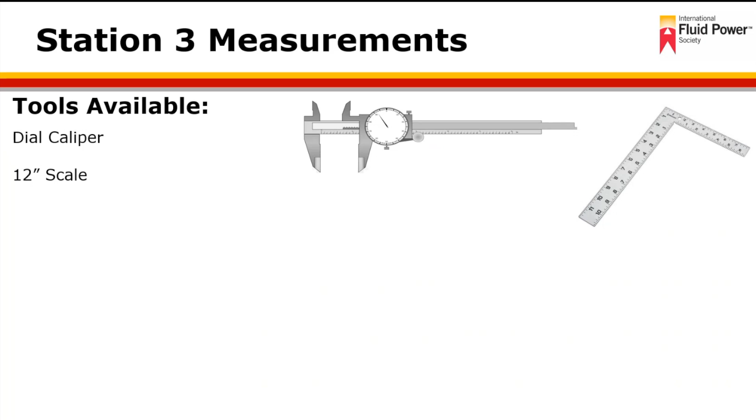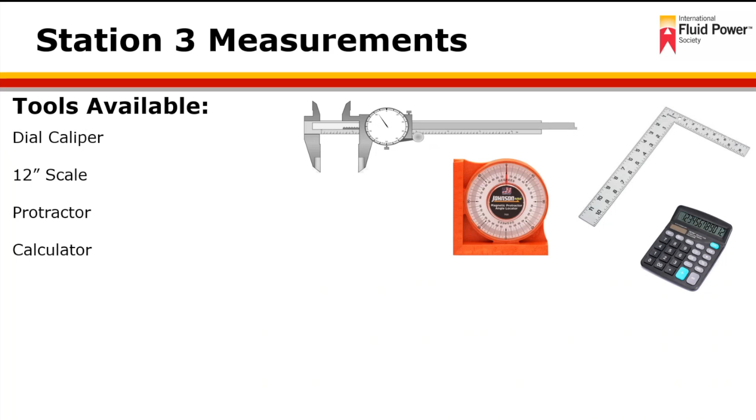The tools available at this station include a dial caliper used to measure the crimp diameter of the hose assembly, a 12-inch scale or square for measuring the hose assembly length, a protractor or angle finder for measuring the terminal end offset angle, a calculator for calculating the amount to be removed from the overall length to determine the hose cut length based on the terminal ends present within the hose assembly, a thread identification kit to aid in measuring the terminal ends for proper identification and sizing, a flashlight, and a magnifying glass, both for inspection of the hose assembly. And finally, available laminates at the station, which we will review shortly.

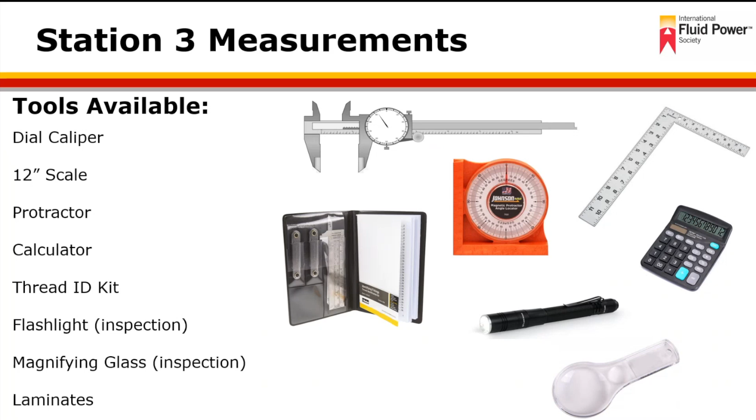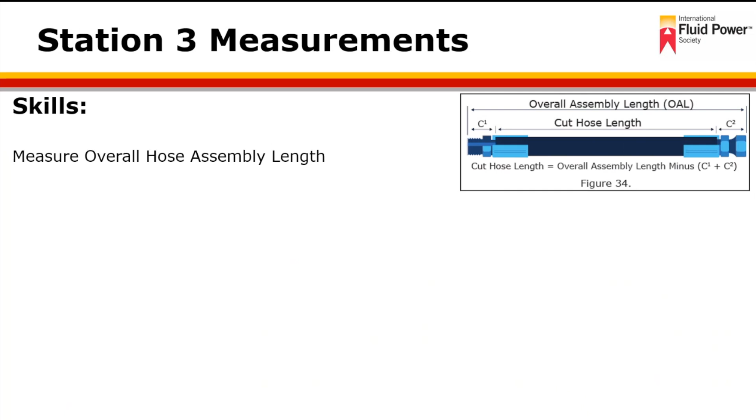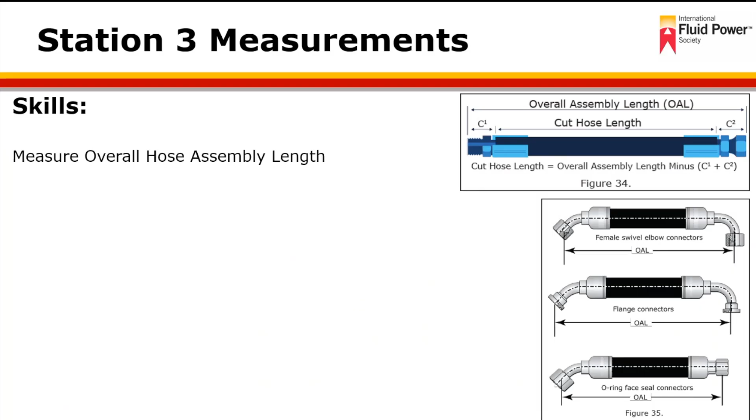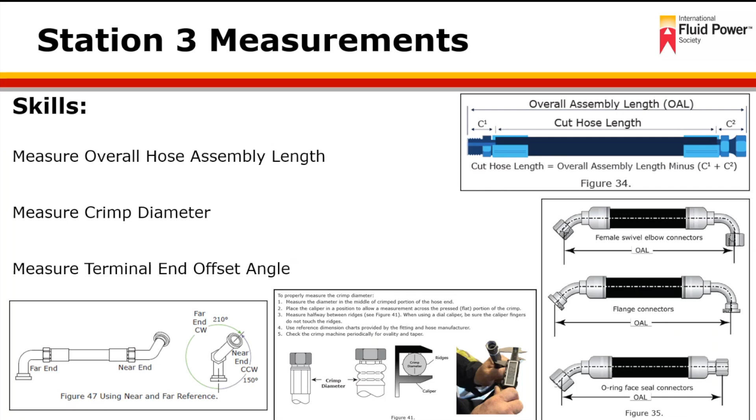The purpose of this station is to demonstrate one's ability to accurately measure the overall hose assembly length, remembering that the measurement points vary based upon the terminal end style and the fitting type. The station will also demonstrate one's ability to accurately measure the final crimp diameter to ensure that the hose is assembled correctly, keeping in mind to measure across the flats, at a midpoint of the crimp, and between the ridges formed by the crimping process. And finally, this station will demonstrate one's ability to measure the terminal end offset angle using a far reference point.

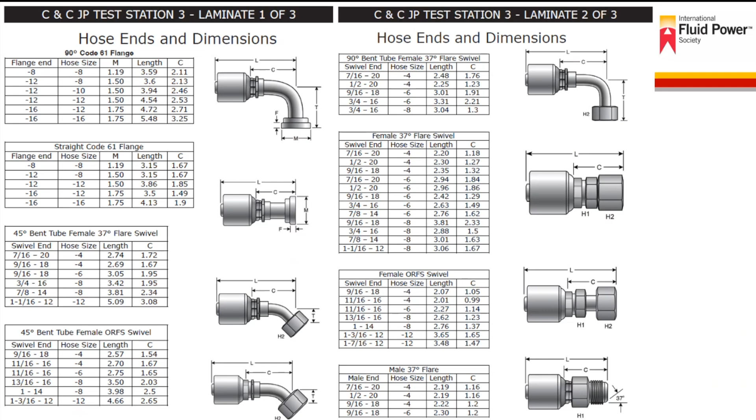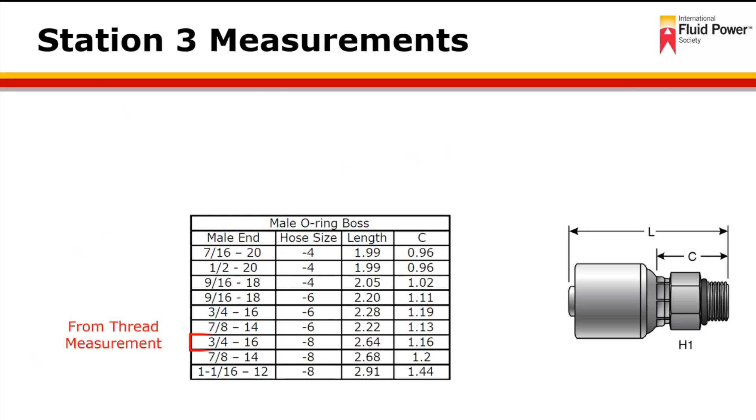If we look at a section, for example, this one here being an O-ring boss male terminal end type, if we measure the threads, we can identify perhaps a 3/4-16. This would be identified based on measurements of the fitting end, as well as the information available within the thread identification kit.

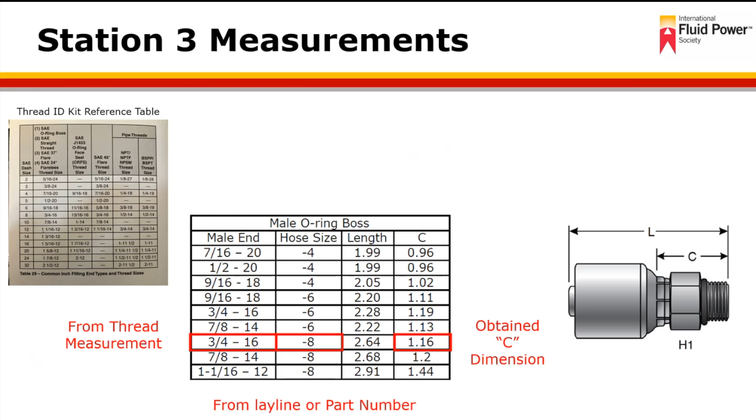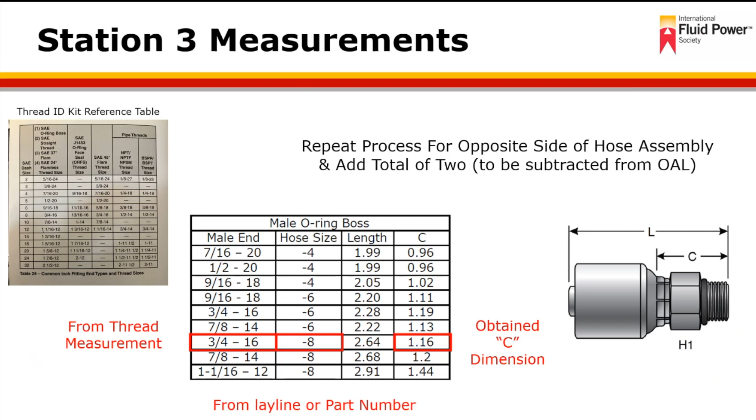Next, we would identify the hose size based on information available in the lay line or the part number of the terminal end. From this information, we can determine from the chart a C dimension, or an amount to be removed from the overall assembly length. We would repeat this same process for the opposite side of the hose assembly based upon the different terminal ends of the completed assembly. The final step would be to add the two together to determine a total amount to be subtracted from the overall assembly length.

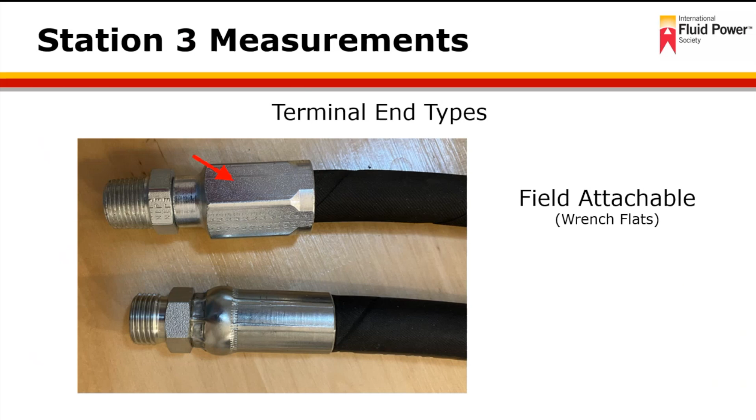As a reminder, field attachable fittings, as shown on the top, are identifiable by the visible wrench flats. This is compared to the crimp style terminal ends, which are identifiable by the flats and the ridges that are formed during the crimping process.

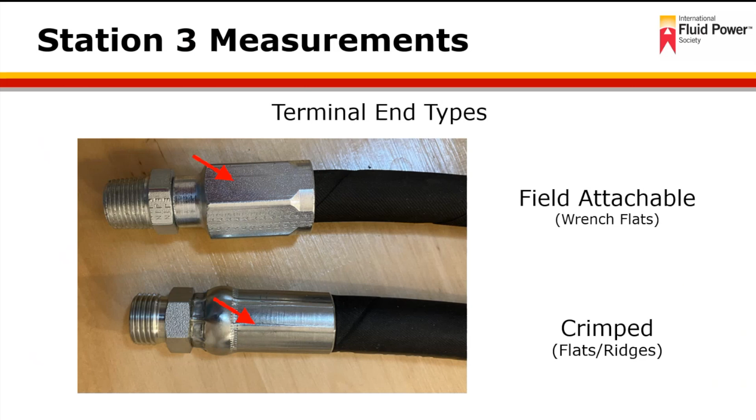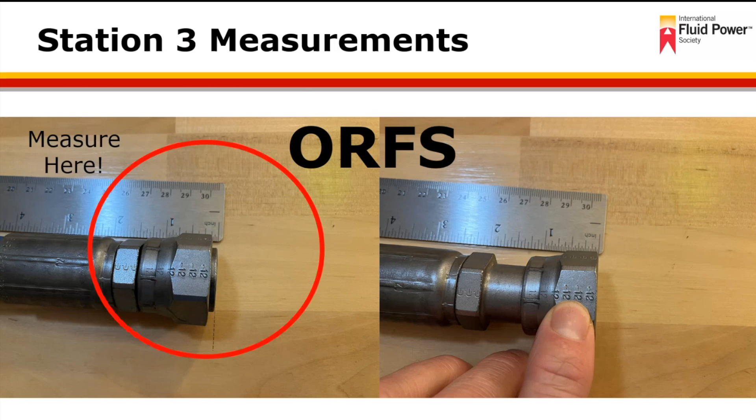Another tip is related to O-ring face seal fittings. Keep in mind that an O-ring face seal assembly hose is measured from sealing surface to sealing surface. So in this case, it may require the swivel end to be slid back to measure from the actual sealing surface, as shown on the left, and not measured from the overall total assembly length, as shown on the right, as is done with other styles of terminal end types.

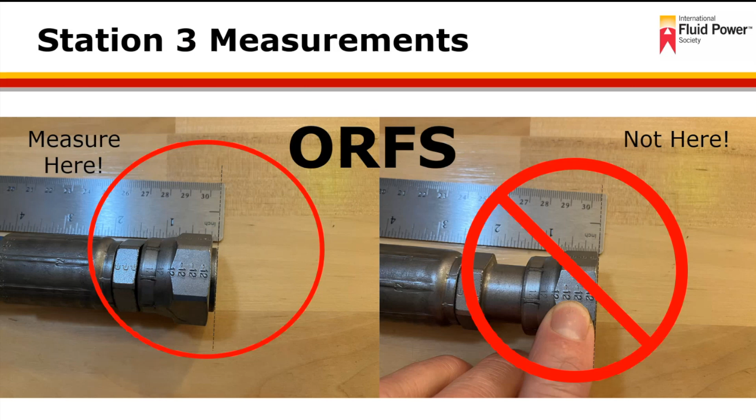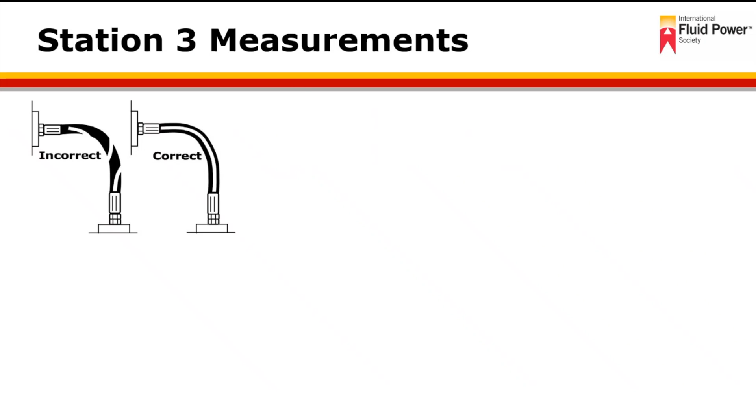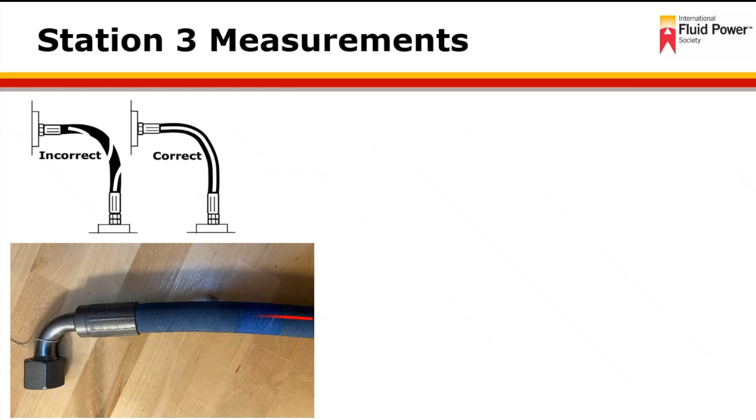Another tip is related to the information on the lay line and the natural curvature of the hose. As the study manual outlines, terminal ends are to be placed in line with the natural curvature of the hose to prevent twisting. As shown in the example, the visual natural curvature exists. So if we consider the hose as an assembly, remember as you're taking measurements to measure parallel to the hose and not between the 2 points. If we measure where it's not parallel, you'll get an inaccurate reading. So ensure that as you're taking measurements, you actually straighten the hose out, unlike what is shown in the natural curvature, to get an accurate reading.

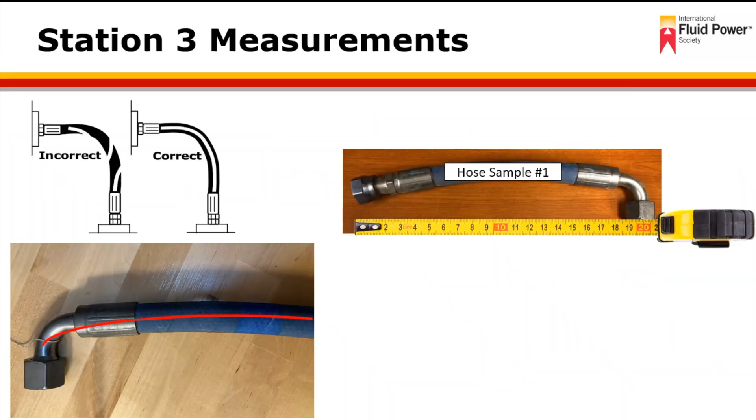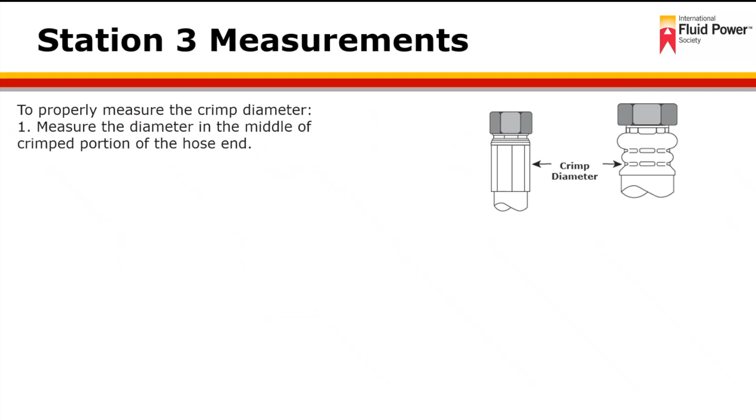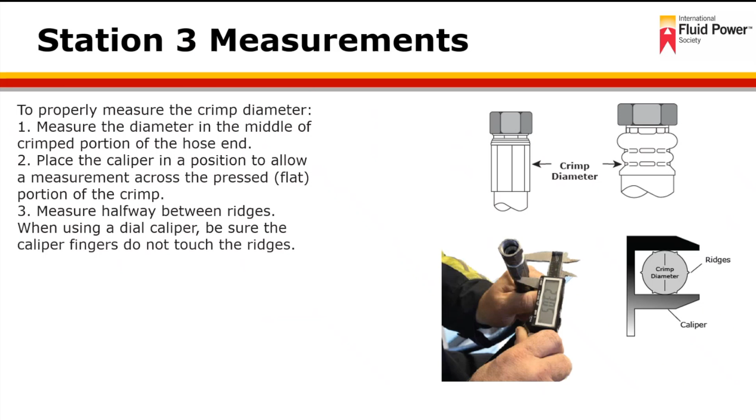Another tip would be to review how to properly measure the crimp diameter of a hose. Remembering that step 1 is to measure the diameter in the middle of the crimped portion of the hose end. Second, place the caliper in the position to allow a measurement across the pressed flat portion of the crimp. Third, measure halfway between the ridges, and when using the dial caliper, be sure that the caliper fingers or jaws do not touch the ridges.

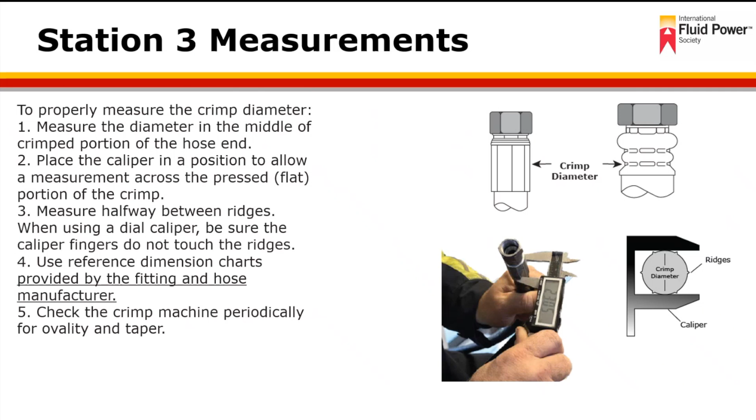Use the reference chart dimensions available from your fitting and hose manufacturer to compare the measurement and ensure that you're between the minimum and maximum crimp diameter of the final hose assembly. And lastly, check your crimp machine periodically for ovality and taper to ensure that it is working correctly and providing an even crimp around the diameter of the hose.

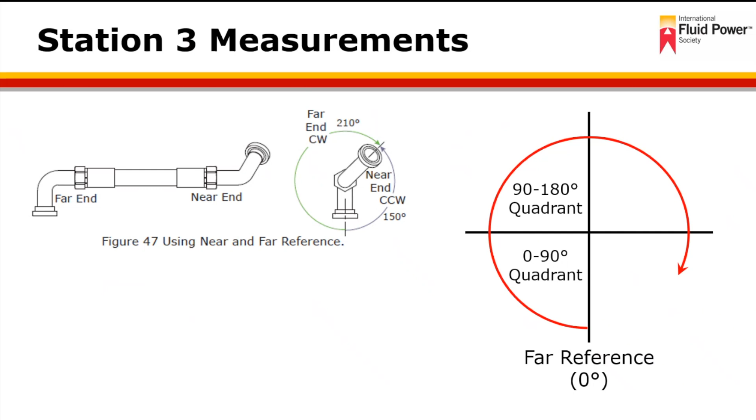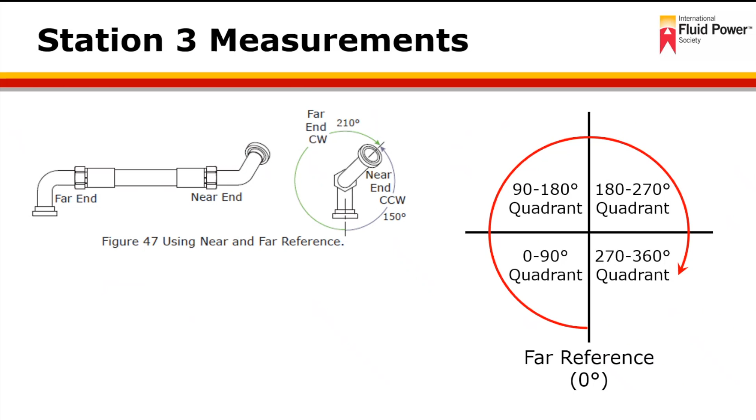Another tip would be to double check the offset angle when using the far reference point. Remember that using a far reference point starts at the far point or the 6 o'clock position and then measures clockwise in rotation from that reference point. This would place 0 to 90 degrees in the lower left-hand quadrant, 90 to 180 degrees in the upper left-hand quadrant, 180 to 270 degrees in the upper right quadrant, and finally 270 to 360 degrees in the lower right-hand quadrant. These can all be measured with the protractor or the angle gauge included as one of the tools within this station.